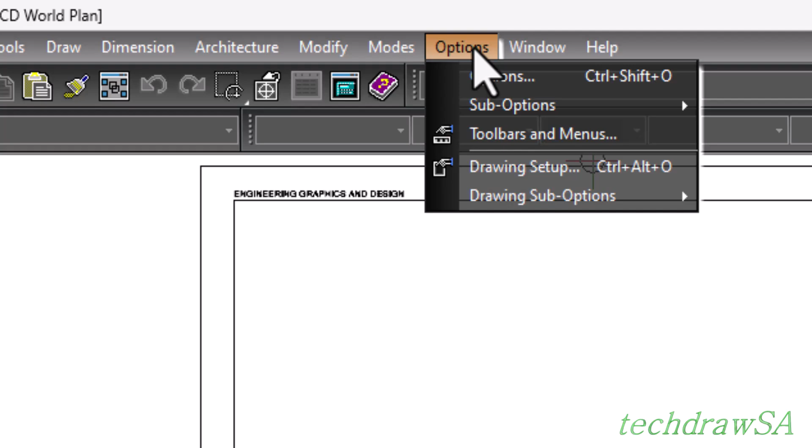To get started, we're going to go to our options menu, and then we will select the drawing setup tab. The drawing setup window will appear, and we'll go through the list on the left to check if all of the properties are set correctly. If we click on grid, the grid will be displayed, and we will make sure that all of the settings are as we want them.

I keep my show grid off. For this lesson, I will have ortho selected and my spacing set to 5 by 5 millimeters. If we go to the advanced grid, I don't change much here. However, if you want to change your dimensions on the minor X and Y to 1, you can go and do so. We can go now to the space units.

At space units, there are a few things that I check. Firstly, if it's metric, because we make use of the metric system. And I always have my scale set to an absolute. For this lesson, the scale is also set 1 to 1. The units we work with is set for millimeters. Everything must be millimeters, and my precision is set to 1. That is all that I check here.

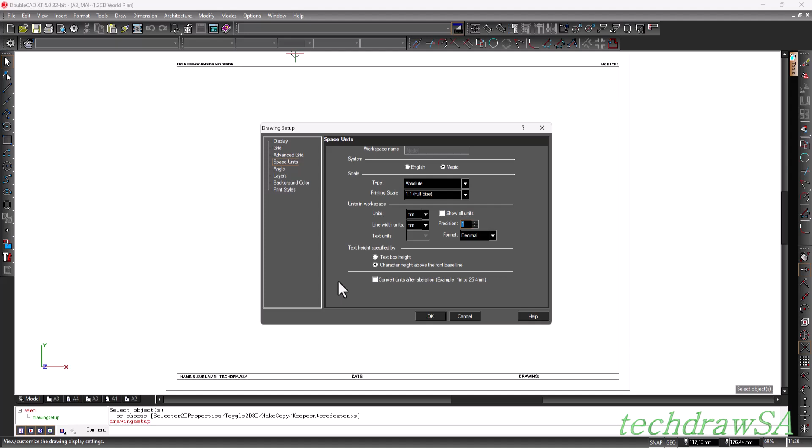At angle, I don't have anything here that I want to change. I just make sure that my precision is set to 1 and the rest as per the default.

Next, we have the layers. I make sure that I have all the main layers set up that I need for the drawing. In my first DoubleCAD tutorial, I demonstrate how to set up the layers. I'm going to add another layer that says grid, and you will see why I do that, because of this specific exercise that I want to do.

The exercise that I'm busy with is similar to the drawing in your workbooks. Therefore, I'm going to create a new layer that says grid, as I'm going to change its properties. I'm going to change the color of the grid line to blue, and I'm going to make sure that it is a light continuous line and it's got a 0 thickness.

I will also check that the settings and properties of my other lines are set correctly, that the colors are correct, that the line styles are correct, and that the line widths are set to a thickness of the lines as they are needed. Currently, none of the layers are locked, so we will discuss this a bit later.

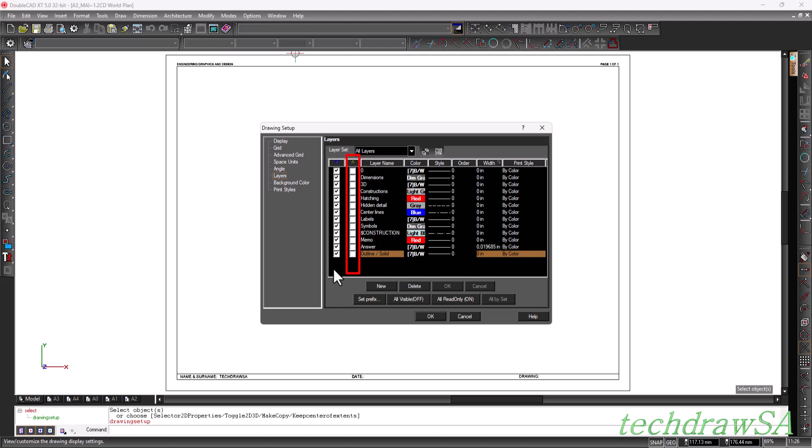At this stage, it will be a good idea to save the file. Make sure that your file name and descriptions are always correct and informative. Thus far, you would have set up a worksheet of the drawing onto your drawing board if you are following the video while drawing on paper. If you are following along on your CAD, you can pause the video and ensure that all the layers are set up and that you have the template open on your screen.

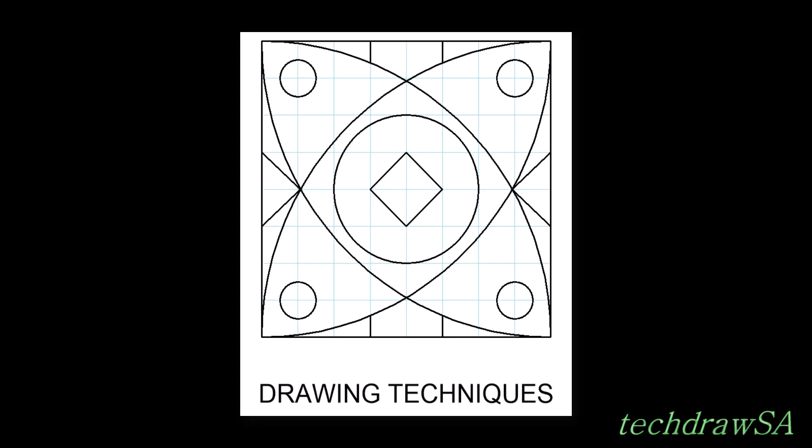Let's start with the drawing. Here is the preview again of the drawing that we want to do as an example. On the far left of the screen are all the drawing tools. We will select the horizontal construction line tool from the options that are available.

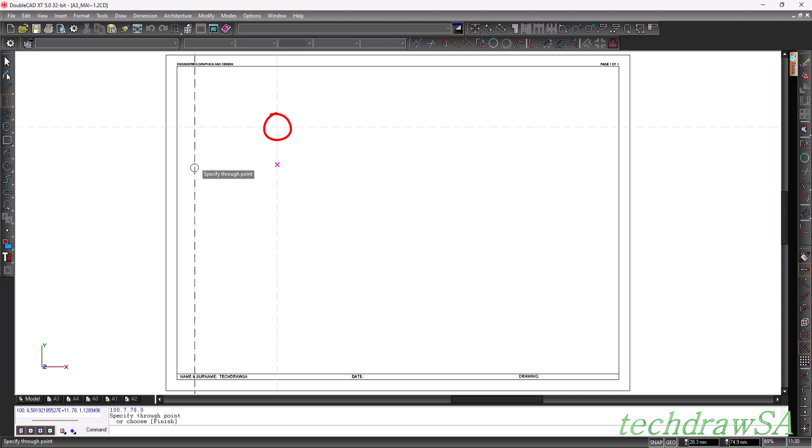With the horizontal construction line tool selected, we will start at a proper height on the canvas and draw the horizontal line construction as a guide. We will again go to the tool selection, and this time we will select the vertical construction line tool. On the canvas, we will draw a vertical line construction as a guide. This will provide us with a reference point from which we will start our construction.

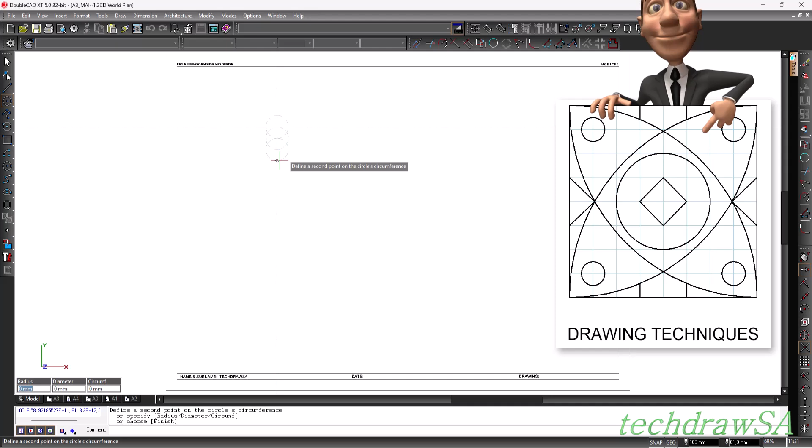Now we will select the circle construction tool on the far left. With the circle construction tool selected, we are now going to draw the grid layout of our drawing. Each grid block is spaced 10 mm apart. Therefore, we will place our compass at the starting point, and then with the compass set to 10 mm, we will draw 8 circles, each with a radius of 10 mm, because the total height of our drawing consists of 8 grid blocks on the vertical and the same on the horizontal.

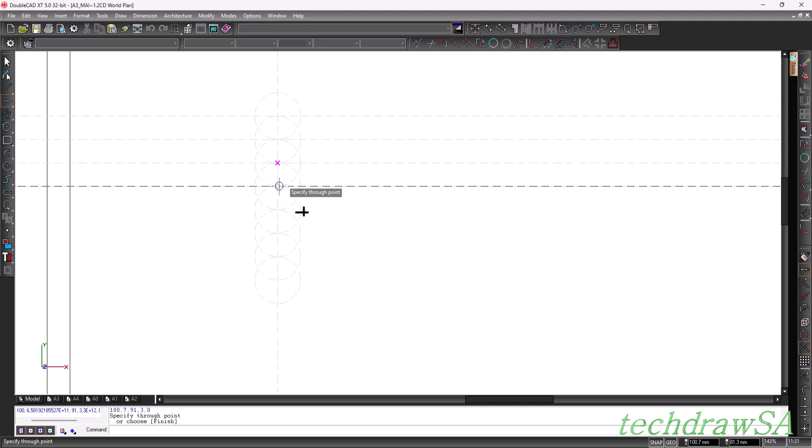To speed up our workflow, we are now going to select the horizontal construction line tool again, and then we're going to go to each of the 10 mm segments and draw a horizontal construction line until we have divided the grid into 8 horizontal lines. While you are drawing on paper, you will do the same steps as what I am doing here on CAD.

To start with the vertical construction lines, I will first select the vertical construction line tool. Now I will draw a vertical construction line at the first segment to create the first vertical grid block row. On paper, you will do the same steps with your instruments.

With the first vertical construction line drawn, I'm going to select the circle construction line tool again. With the circle construction tool selected, I'm going to now draw the rest of the required segments for the vertical grid blocks.

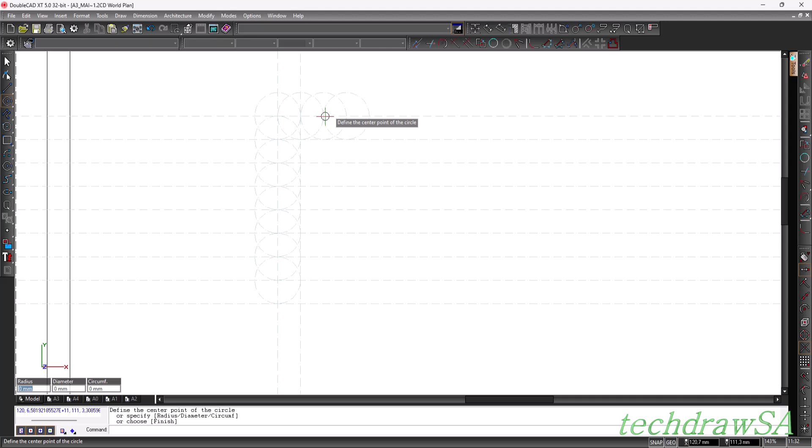Once this is done, I'm going to select the vertical construction line tool and draw a vertical construction line through each one of the determined or constructed segments. Again, on paper you will have done the same steps and followed the same procedures.

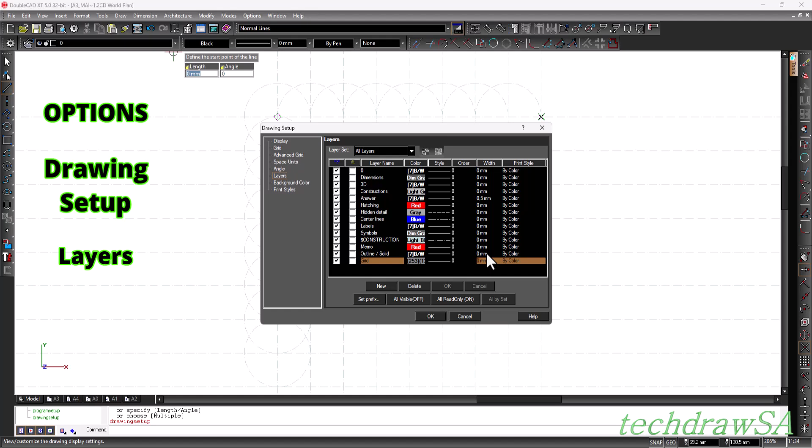Now we want to start with the actual outlines of the drawing. First we want to make sure our layers are set up correctly. Go to Options, Drawing Setup, then select Layers. I will make sure the grid is set to the correct color. I will also change my outlines and solids layer to 1mm for this demonstration so the outlines are clearer, but when you draw on CAD you will make it 0.5mm for the outline because on the print the outline will display correctly. Once I'm satisfied with my layer setup, I will start drawing.

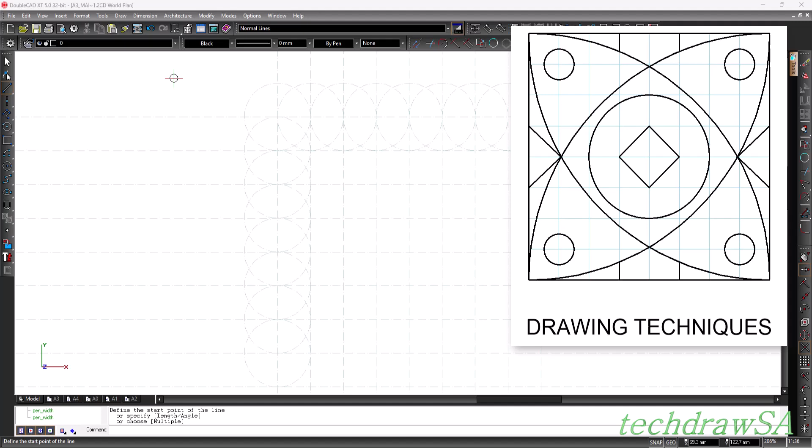Back on our canvas, there are several ways to start with this drawing, and several tools I can use to draw with. In CAD, there are usually several different methods that can be used. One way is to use construction lines, or you can immediately start drawing with solid tools. When drawing on paper, you can also immediately draw some of the lines solid, but sometimes it is good to first do a construction line to plan the layout.

I'm going to make sure that I select the correct layer to draw on. Then I will start at the starting point and start drawing with the solid line, connecting each of the outer corners of my shape.

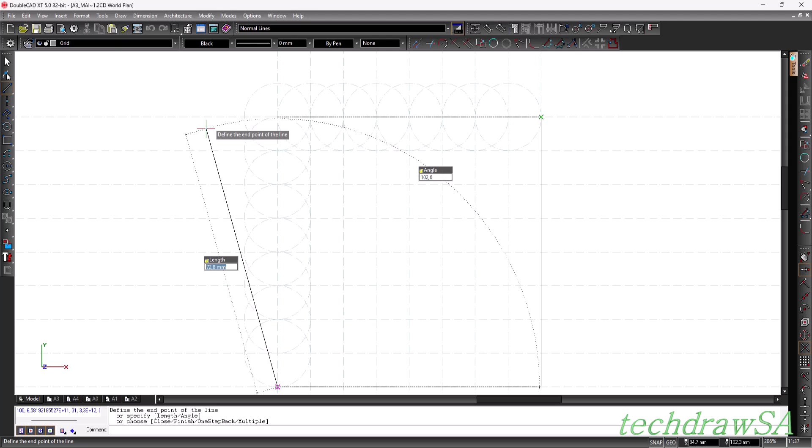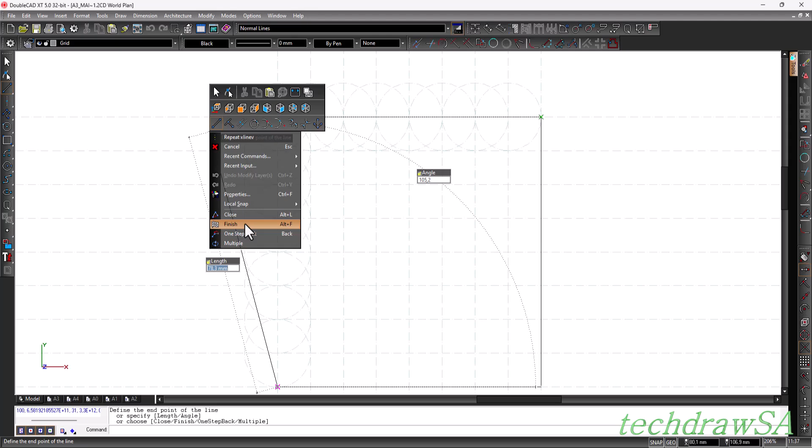In DoubleCAD, you will notice that the line is continuous, almost like a polyline, and for the demonstration, I want to show you what happens if I stop at the third point and not finish the last segment of the line. If I right-click on the canvas, new options become available: you have the option to close or to finish the line segments. If you close the line segments, it will create a plane with the 4 line segments seen as one plane. But if you select finish, it will not create a plane, and each line segment will be seen as a separate entity. For this purpose, I'm just going to select finish, so each line segment will be seen separately and not as a plane.

I'm going to finish the outlines by selecting the line tool. Make sure that you are snapping to the exact beginning and end of each line, and it is best to zoom in on the place you want to snap to. To finish drawing the line segment, you can press Escape on the keyboard or right-click and select Finish.

Next, I will again select the line tool option and start drawing all of the horizontal lines on the grid to create the grid layout. You will follow the same process on your paper drawing, making use of your board, ruler and instruments. I will speed up the process so that it goes a bit quicker.

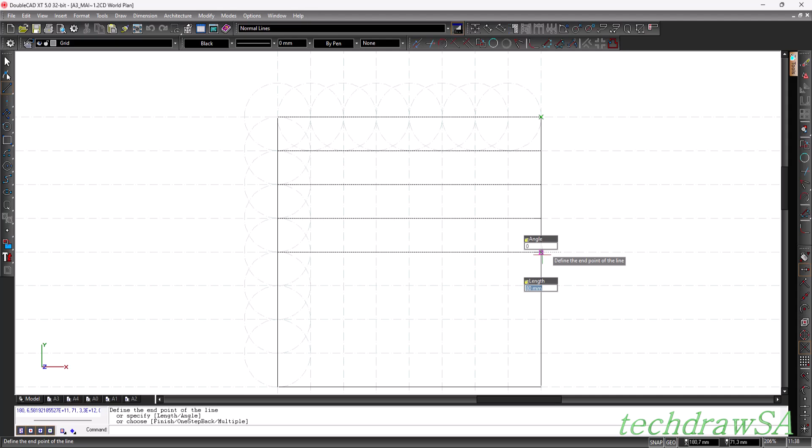To do the vertical lines, I will again select the line tool. I will then draw all the vertical grid lines, and I will speed up the process so it goes a bit quicker. You will follow the same process on your paper drawing, making use of your instruments.

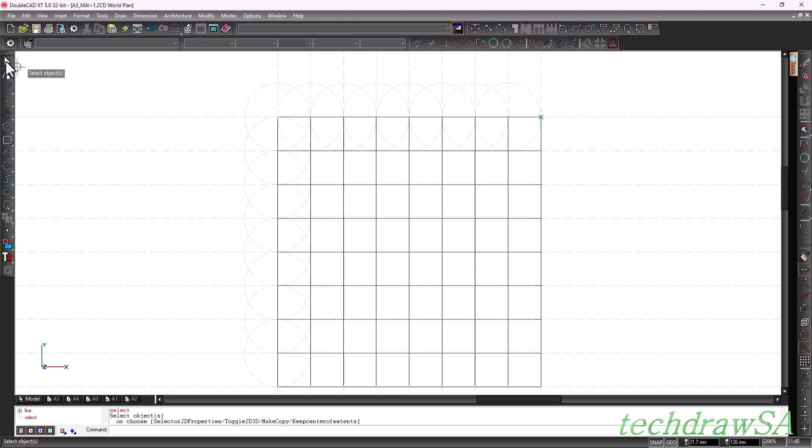The next thing I want to do is select all of the grid lines I've drawn and put them onto the correct layer, because the lines are too dark at this stage and we want to make sure they are in the background, so that when we draw the solid lines they are visible on top of the grid lines. In your worksheet, these grid lines have been printed for you already.

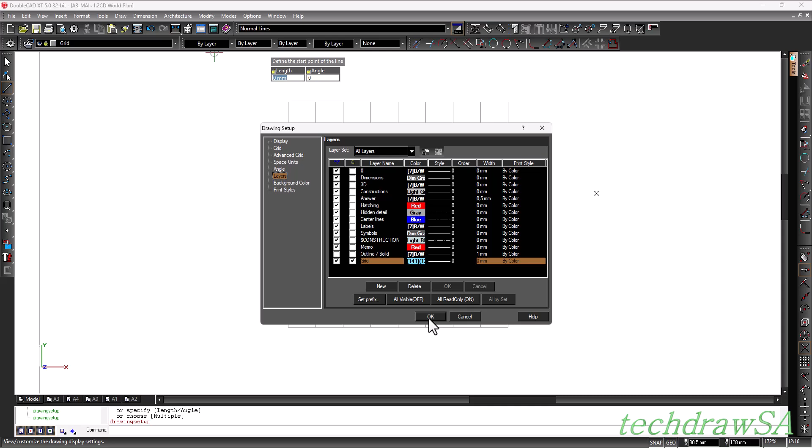We select all of the grid lines first, then go to the layers option and select the grid layer. We need to check all of the layer settings so that the properties we created from the start will be applied to the selected layer we are using. We will also go back to our layer setting under the options menu just to make sure our setup is done correctly. I want to change the color of the grid layer to light blue. Once I'm happy with the setup of the layer, I'm going to select by layer for each one of the functions of that layer.

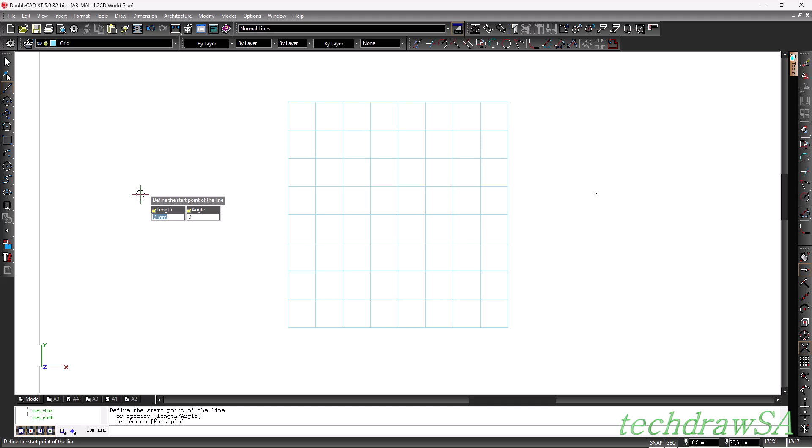I can also toggle on or off the lock key of a layer, which will prevent me from accidentally selecting that layer. I can also make a layer visible or invisible by clicking on the eye symbol. Once I'm happy with my layer settings, I can finally continue to draw the first solid lines of my drawing.

Referring to our example drawing, we are now going to start with the solid lines by selecting the circle tool. To first explain the process, I'm going to select the construction circle tool as a setup to draw the solid arc. I will place my compass at one of the corners of the grid and draw the first construction arc. This will give me the guideline of where I want to place the solid arc.

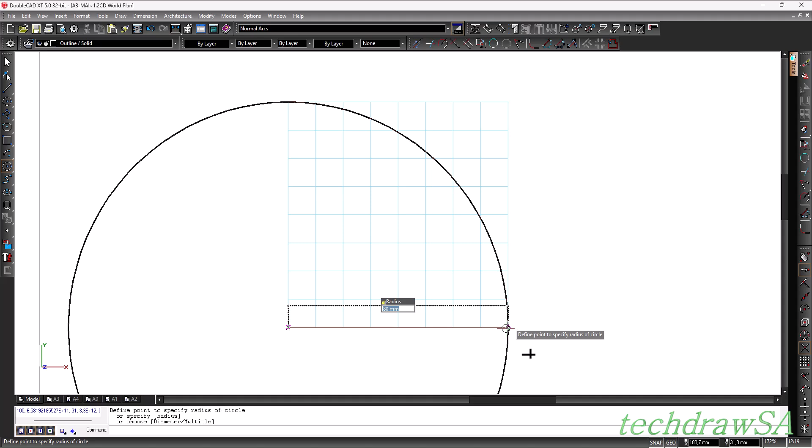Now I will select the solid circle tool and make sure that I'm drawing on the correct layer and that all my properties for the layer are set correctly. With my solid circle tool selected, I will place my compass at the corner of the grid and draw the first solid arc using the guideline I've created with my constructions tool.

Now I will trim the drawn circle with the split entities tool so that the beginning and end of the arc snap to the opposite corners of the grid. I will now delete the excess arcs. I do not need the construction circle in the background anymore, so I'm going to go to Edit, Clear All Constructions, and this will clean up my canvas.

If you are drawing on paper, you will follow the same steps and methods explained here. There are several ways to continue with the drawing. You can continue to draw the circle constructions first before you draw your final arc, or if you are confident enough, you can draw the solid arcs directly.

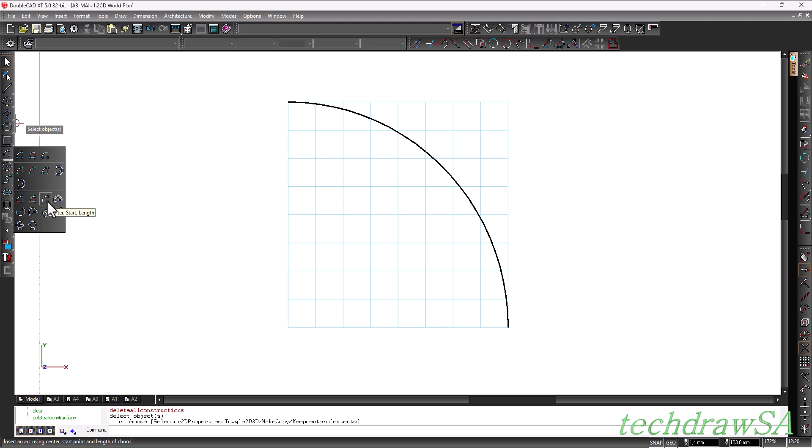For this we will use another tool called Start Center End. I make use of this tool a lot. It is the same as drawing an arc on paper. Now you will place your compass at the corner of the grid, and with the solid arc tool selected, you will draw the next big arc.

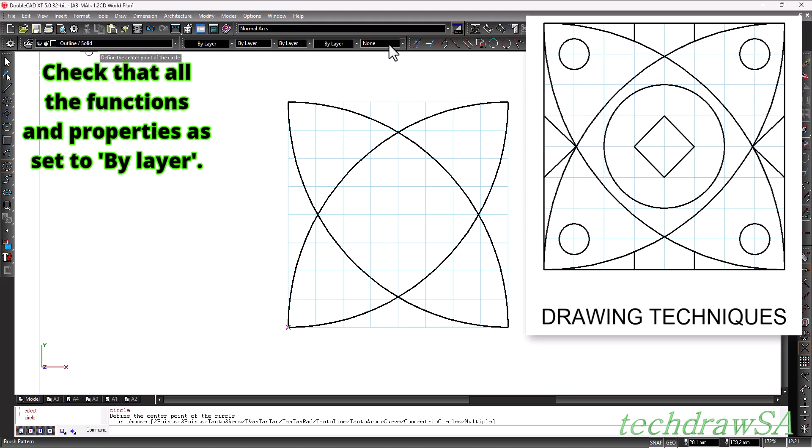You will continue to do this from each of the corners of the grid until you have replicated the example drawing. Referring back to our example drawing, we are going to continue with the other solid lines, starting with the big circle in the center.

Once the circle is drawn, we are going to draw the diamond shape in the middle. Once the lines have been drawn, you will have the option to either close or finish the line segments. You will learn that the sequence in which you draw is entirely up to you.

While referencing the example image, I'm now going to draw the smaller circles on the inside of the big arcs. As with every line that I draw, I'm checking to make sure that I'm on the right layer and that the properties of that layer are set correctly, and then I will continue to draw the smaller circles onto each correct position as per the example drawing.

We are now nearing the end of our drawing construction, and there are only a few details left to be drawn. While we are busy with the finishing touches and drawing the last lines, make sure that you are drawing on the correct layer and that the right tool has been selected.

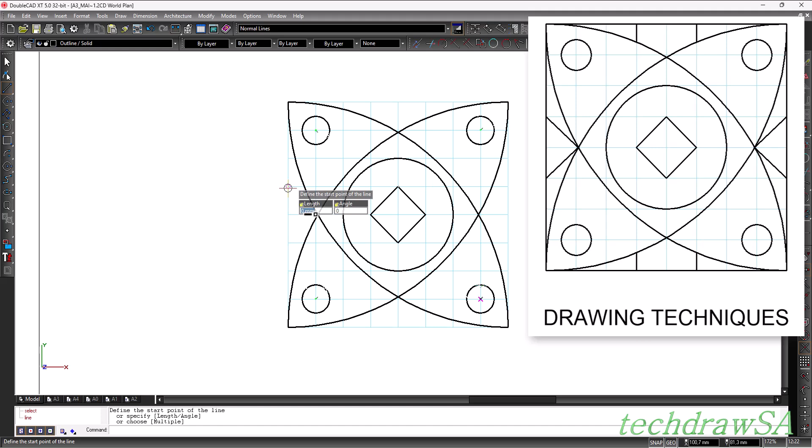As we draw, we make sure that we zoom in on the detail that we want to snap to. Be careful, it is easy to accidentally snap to the wrong intersection or reference point. Now that you have completed the diagonal line, you will also draw in the rest of the remaining straight lines to complete the solid outlines of the drawing.

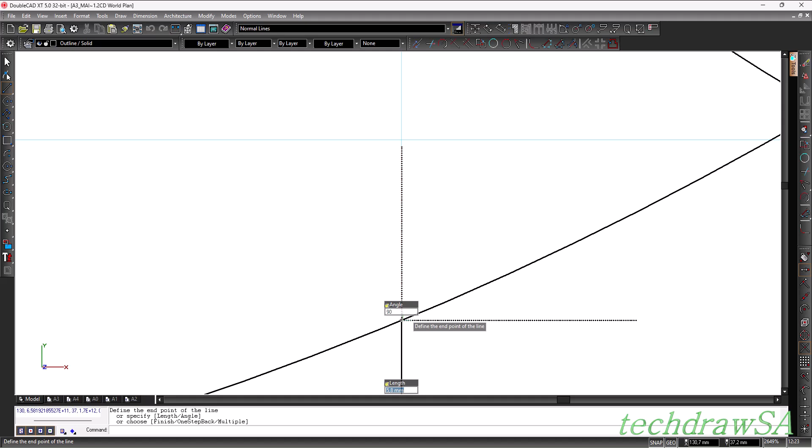I'm going to fast forward the video here just to show you the final procedures. Please remember that you will do the same on the paper drawing and follow the same method. Finally, we will do another check on our example drawing and make sure that we haven't missed any details. You will have to draw all the required center lines in by yourself at the end of the drawing.

Another requirement for the drawing is to add the heading or name of the drawing. To do that, we are going to the text selection icon and we will set up the default properties for our text that we can use every time we want to type in text. After you have selected the text icon, the text properties screen will pop up.

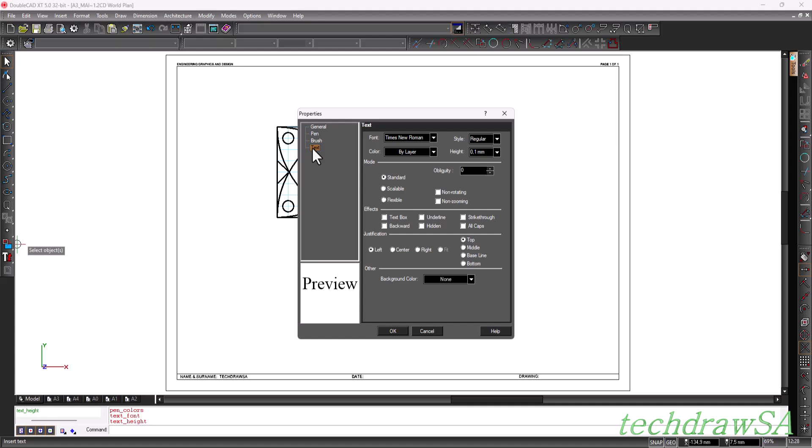Now you will select text on the left side of the pop-up screen. You will have the option to change the font size or height of the text and any other properties of the text that you would like to change. This will then become the default property when you are doing text within your drawing.

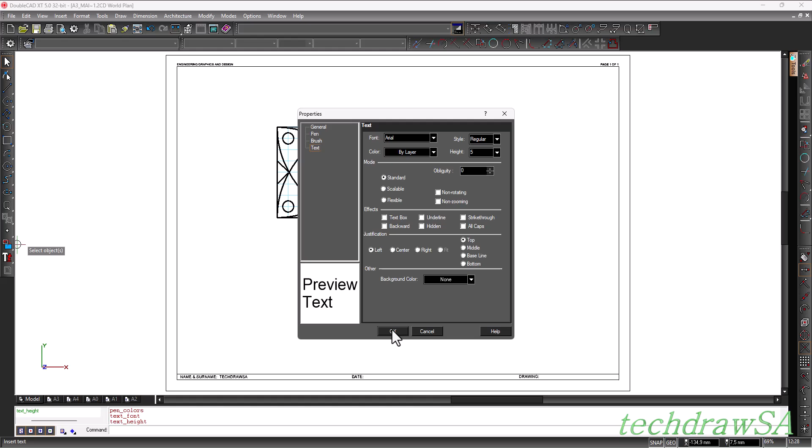Let's start by adding a name for this drawing that says Drawing Techniques. Remember that all writing must be done in capital block letters and that you may only write in pencil.

Now that we have given the drawing a name, we are going to draw construction lines so that we can snap the drawing name into its correct position.

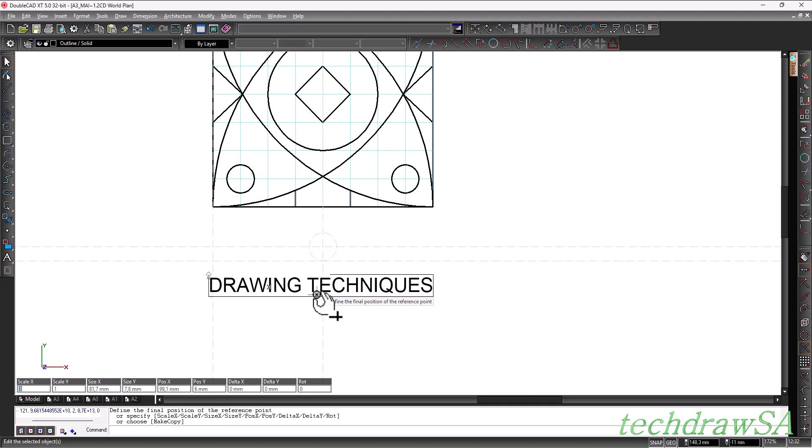Once the construction lines are drawn in place, we select Text. With the text selected, you will see that there are handles that appear around the text. It is important to make sure that your vertex snaps are selected. To do precise snapping, we have to make use of the Alt-D shortcut, which will then give us the snap aperture reference point.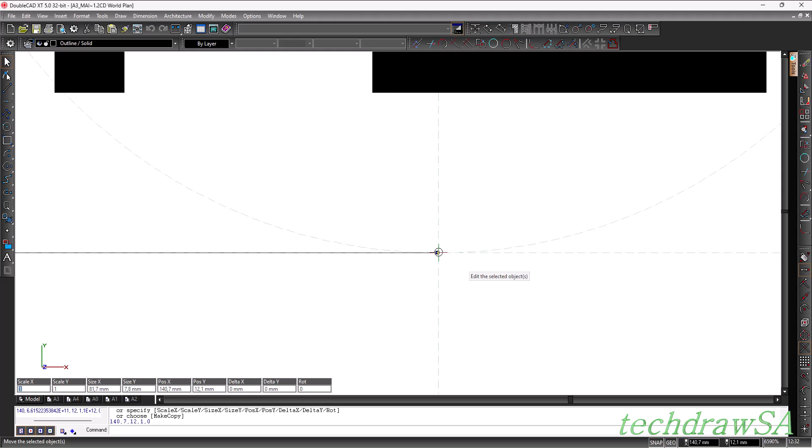We will then select the middle handle at the bottom of the text. Now we can click and drag the yellow dot, which represents the snap aperture reference point, to snap to the correct intersection, and we can place our text in the middle below our drawing.

Once we have snapped our text in the correct position, we will do the final cleanup of our drawing by getting rid of all the construction lines, and for that we will again go to Edit, Clear All Constructions. And that will conclude this drawing.